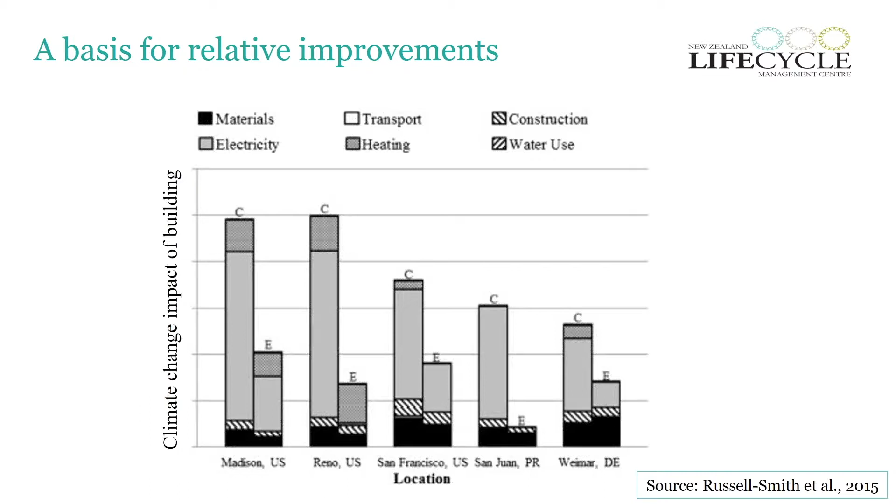I'll start with the question: what does LCA mean to buildings? I hope everyone has an idea about what LCA is. In terms of LCA for buildings, they generally evaluate the environmental impacts of a particular product. If it's a building, it may be a material, it can be a component, a steel bar or cement, etc. And then it will tell how much better it is in terms of another product. For example, steel bar A is better than steel bar B, or the other way. These outcomes generally help us to compare the environmental impacts and come to environmental improvements in terms of relative assessments.

But the question is, are these relative assessments like LCA and their results always sufficient to achieve environmental sustainability? Yes, no, or maybe. There are different answers. In one way, yes, they may help because they support eco-efficiency improvements. But when production volumes and demand increase, the question is whether the eco-efficiency improvements are sufficient to achieve sustainability. In that case, it is obvious that only improving the eco-efficiency of products or materials is not sufficient to achieve environmental sustainability globally. So what should be the solution?

The solution can be setting some benchmarks, but they cannot be just relative, they should be absolute. That means these benchmarks should inform the environmental impacts in terms of the global environmental boundaries. For example, these buildings are now relatively evaluated, but if there is a target or a benchmark in terms of the global environmental boundaries, then we can decide whether the building or the building materials which we use are really sustainable and whether they can be considered sufficient to achieve global environmental sustainability.

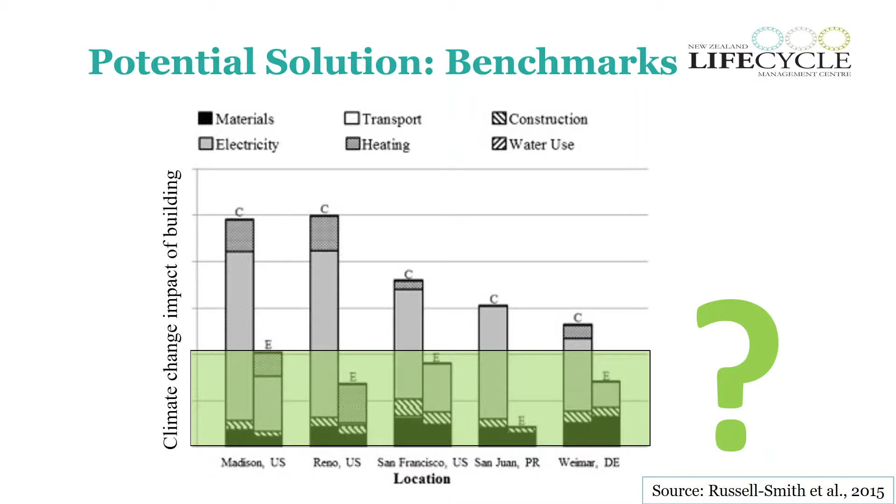In that context, there is quite a big interest in developing science-based targets. You may have heard these science-based targets try to align the environmental impacts of companies, sectors, countries, cities with the global environmental targets. These approaches are available for products like electricity and steel, whose sectors are kind of uniform. For example, steel produced in New Zealand and steel produced in China can be directly compared. But when it comes to the construction sector, such direct comparisons are not possible because the context of the construction, the material requirements, the environment, temperature, weather, so many factors influence the construction sector, and the complexity of the buildings and materials we use also has implications on defining such an approach.

Furthermore, compared to a product like a computer or car which has a shorter lifetime, buildings have quite a long lifetime. For example, in New Zealand, residential buildings have a lifetime up to 150 years. There are some buildings older than 150 years. So we have to address these different challenges when setting climate or environmental targets for the construction sector. To date, there are some efforts which have focused on setting climate targets for buildings, particularly in Switzerland and Denmark. They have tried to calculate the share of the global carbon budget available in the future for a particular building, like the amount of climate impacts a residential house in Switzerland can emit in 2050.

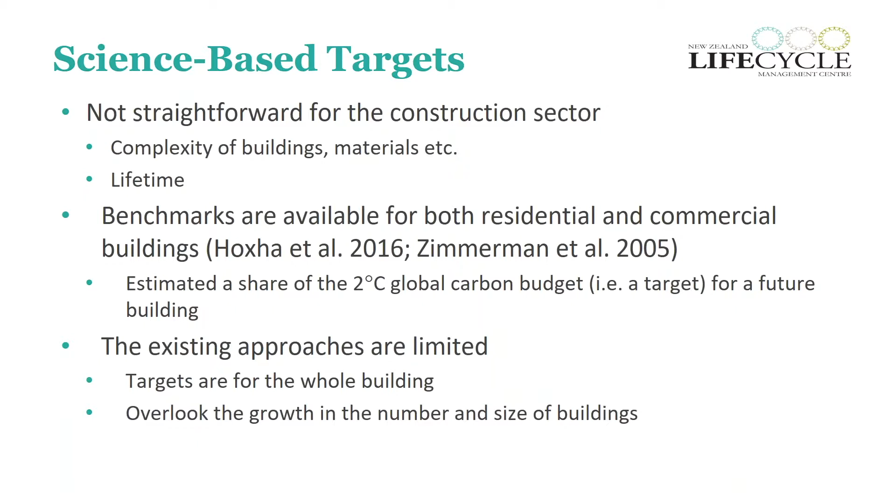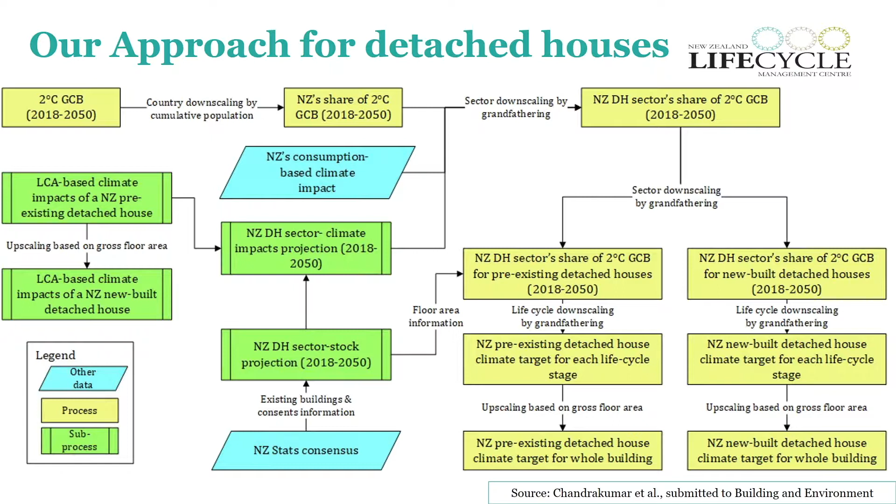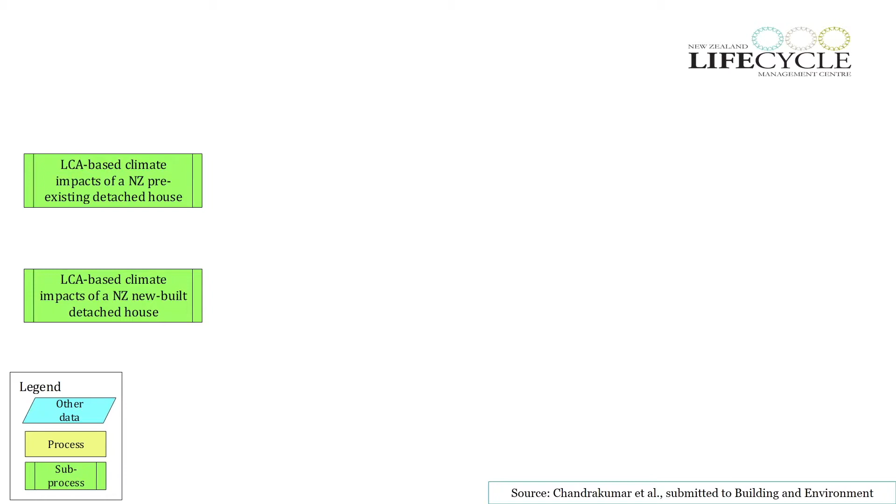So to that end, we have come up with an approach. It may look a bit complicated, but I'm going to explain step by step so that you can get an idea how to set a climate target. In this webinar, I'll be talking about setting a climate target for a residential building in New Zealand, particularly a detached house. What we first do is calculate the climate impacts of a pre-existing detached house, one which has already been built, and we also model a set of new detached houses that will be built in the next few years.

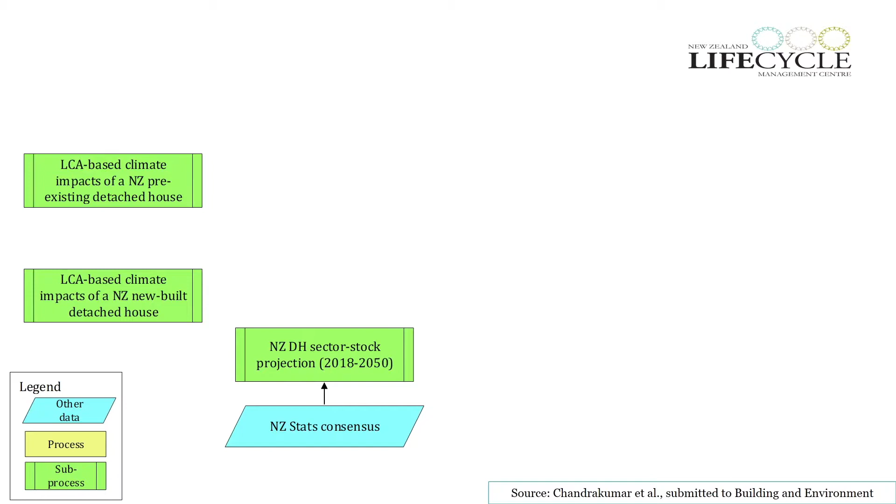And we also have the New Zealand statistics census, based on which we project the building stock from 2018 up to 2050. So when we know the amount of existing buildings and future buildings, we can calculate the climate impacts of the New Zealand building sector. On the other hand, we take the global carbon budget for the 2 degrees Celsius climate threshold and assign a share of it, firstly to New Zealand, based on population: the share of New Zealand's population between 2018 and 2050 compared to the global population. So we get the carbon budget available for New Zealand.

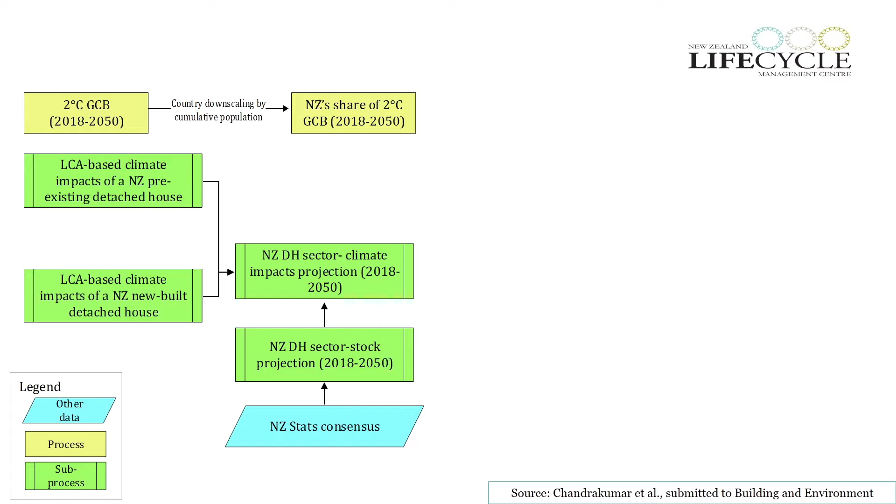And then, based on the ratio of New Zealand's building sector climate impacts to New Zealand's total consumption-based climate impact, we assign a share of the New Zealand carbon budget to the construction sector. Then we come to the carbon budget share available for detached houses. We share the carbon budget of detached houses with the pre-existing, old buildings which have already been built, and then we assign a share of that old detached house budget to the life cycle stages.

So we have the carbon budget available for the old buildings, and we know the life cycle stages involved with these old buildings. For example, if you take an old building in the period 2018 to 2050, we don't have to consider the construction of the building or the production of materials used during construction. The main priority will be the operational phase of the buildings, and some buildings will be demolished during this period. Those are the key life cycle stages we have to focus on for pre-existing buildings, so we'll set climate targets based on those life cycle stages.

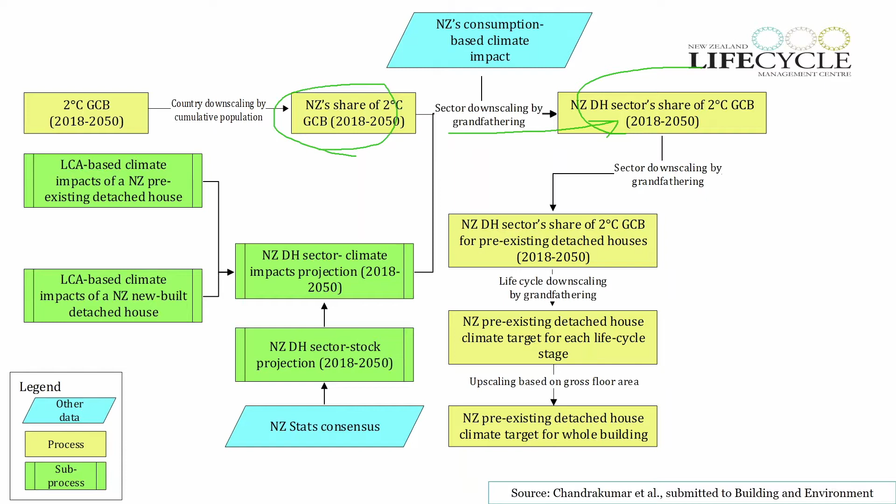And then when you have climate targets for different life cycle stages and you get information about the floor area of the building, you can upscale those climate targets based on the floor area, so that you have a climate target for the entire pre-existing detached building. Likewise, we can do it for the new build detached houses: check the carbon budget for the new build detached housing sector and consider the life cycle stages.

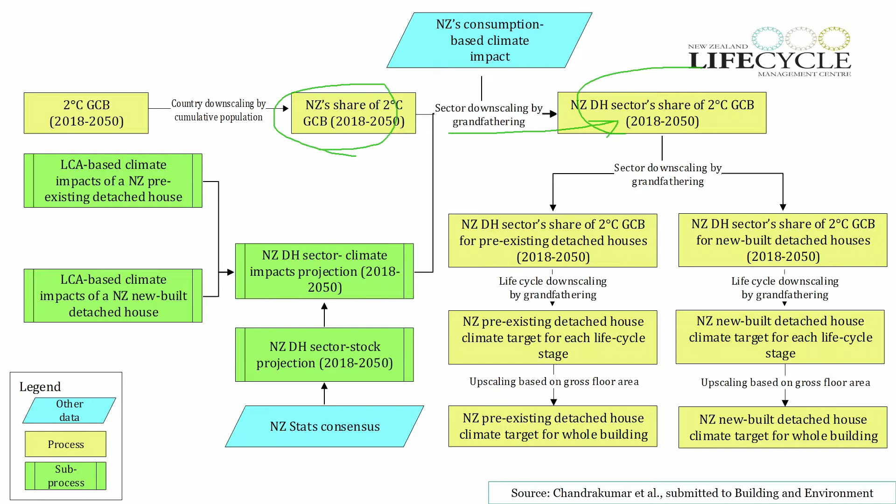In this case, a new build detached house has a lifetime of 90 years, so we don't have to think about the demolition phase, because it won't happen during this 32-year period. The main focus should be the construction of the building and maintenance, as well as the operational energy use phase of these buildings. And then we again share this carbon budget among different life cycle stages. Finally, we upscale the life cycle stage climate targets to calculate a climate target for the entire building.

So I'm showing the results here.

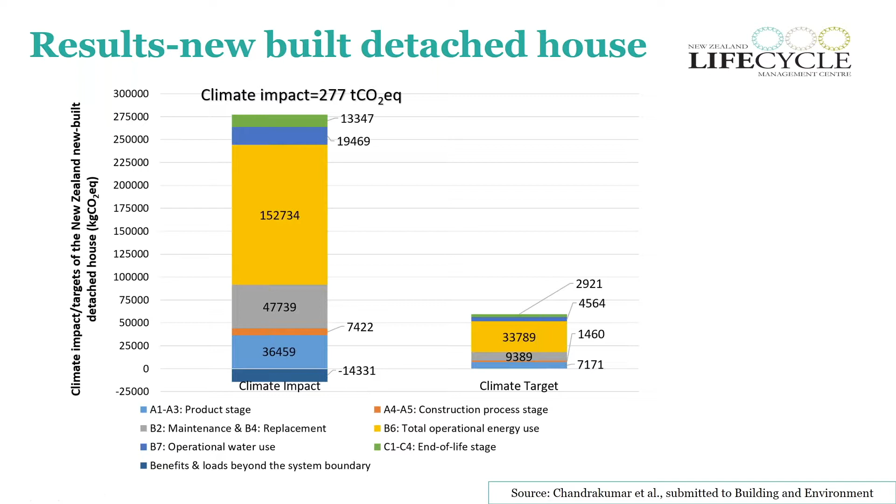So in the left column, you can see the climate impact of the New Zealand new build detached house, which we expect to be built in the future. It says around 277 ton CO2 equivalent for a 90-year building lifetime. At the same time, using this proposed approach, the climate target will be around 59 ton CO2 equivalent for the same time period. That means the climate impacts of the new built detached house should be reduced by around 79%.

Similarly, we can do the analysis for the pre-existing detached houses to see what reduction is required in terms of the building, as well as at different life cycle stages. So to conclude, these kinds of methods provide an idea about the scale of change required to improve the building design, and how to manage the building throughout the operational phase. We are at the moment working on townhouses and apartments to develop similar climate targets, and we have also done similar work for commercial office buildings in New Zealand.

However, we have to note that these kinds of approaches have a large amount of uncertainty, because we use a lot of assumptions and a lot of models. For example, there are different approaches to calculate the carbon budget, and we assign a share of the carbon budget to a building level using different allocation or sharing principles, which also carry uncertainty and influence the results of the proposed approach.

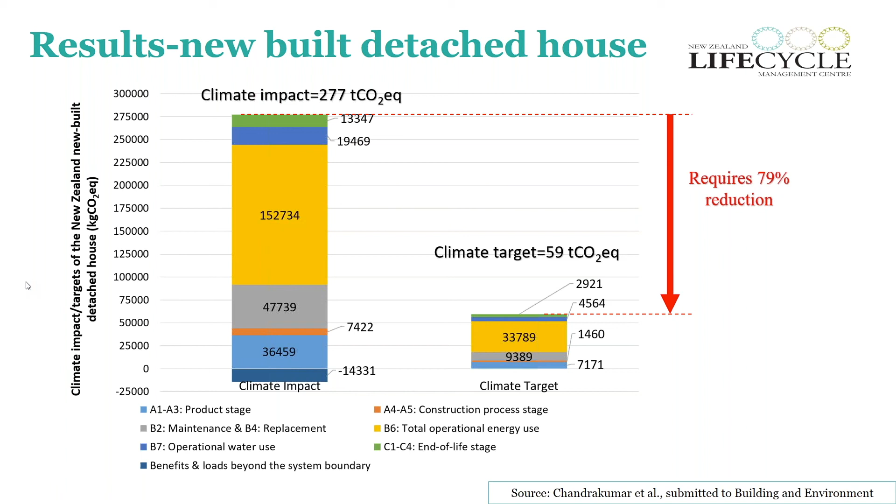Well, thank you very much, Chanjief. I appreciate the work that you've been doing, and I think it's very, very valuable in the conversation of New Zealand's targets and New Zealand's responsibilities with respect to climate change. So I thank you very much for this work, and thank you very much for the presentation.